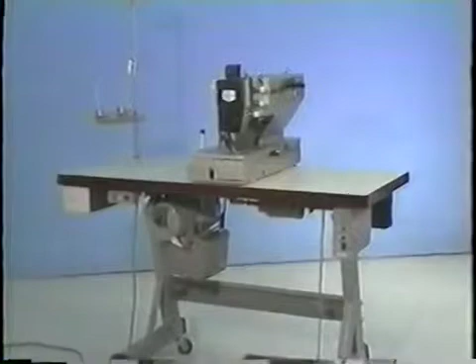Juki has been and will be pursuing essential quality and ideal features of sewing machines, with the intention of realizing a comfortable work environment that satisfies the operator's needs. Types of sewing material and thread are dramatically changing along with the diversification of fashion tastes. This is a newly developed high-performance machine with improved features to catch up with the rapidly changing types of material and thread used to manufacture up-to-date fashion-conscious products.

Our buttonholing machines have enjoyed a good market reputation for their sewing performance, ease of operation, and durability. We have made an overall review on our conventional buttonholing machine and have worked out improvements to its features for more sophisticated design and more powerful sewing ability. Now Juki presents to you our newly developed LBH series machine, ideally suited.

List of applications. The S-type, the standard LBH type, is applied to men's shirts, blouses, etc. The K-type of LBH for knits is applied to knitted underwear, sweaters, etc. Now let's see the following list for other applications.

Specifications. The sewing machine comes with two different types of specifications. One is the electronic stop motor type, and the other is the induction motor type. You can use the machine with or without an automatic run pedal feature.

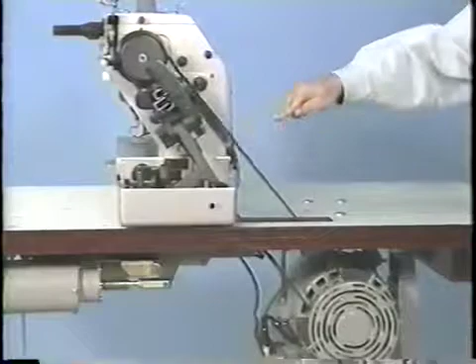Operation: adjusting the belt tension. For the electronic stop motor type machine, the V-belt should slacken about 10 millimeters when you depress the middle of the V-belt with a 1 kilogram load. Loosen the nuts and adjust the tension of the V-belt by moving the motor up or down.

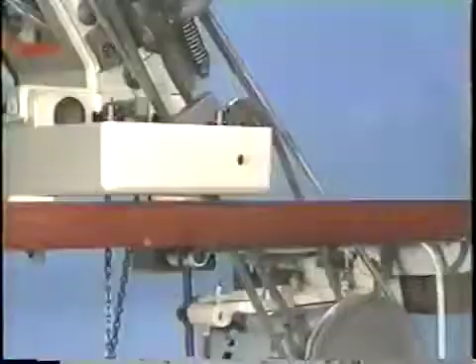For the induction motor type machine, the high-speed belt should slacken about 20 millimeters and the low-speed belt should slacken about 10 millimeters when you depress the middle of respective belts with a 1 kilogram load. Adjust the high-speed belt tension by loosening the nuts and moving the motor mounting base up or down. Adjust the low-speed belt tension using this screw.

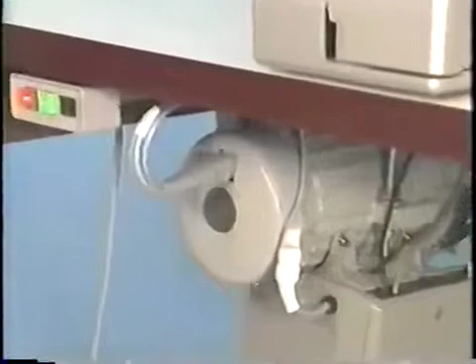Rotational direction. The sewing machine rotates counterclockwise as viewed from the back. For the machine with an electronic stop motor, turn on the power switch when the needle bar is not in its upper stop position. If the machine rotates in the reverse direction, disconnect the connector on the rear of the motor once and reconnect it after turning it 180 degrees.

Lubrication. Tilt the machine head and pour Juki New Defrix Oil No. 1 up to the middle of the red marker lines on the oil gauge.

Threading the machine head. It is very important to thread the machine head correctly. Failed threading of the machine head may result in malfunction of the machine. Please take care to thread the machine head correctly as shown on the display.

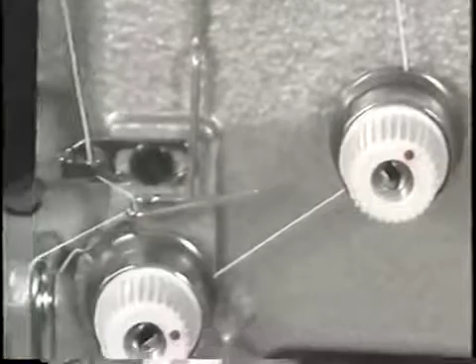When using synthetic filament thread, you should thread all 3 holes in the bobbin thread guide of the needle bar. When using cotton thread or spun thread, you should thread the upper and lower holes. It is not necessary to thread the middle hole.

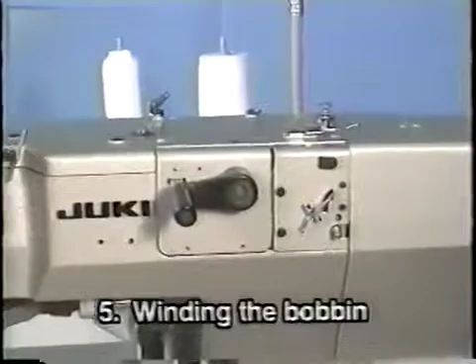Winding the bobbin. Fit a bobbin to the bobbin winder shaft. Thread the tension post guide number 1 and the bobbin thread guide. Wind the bobbin thread round the bobbin several times. Now press the bobbin guide to wind the bobbin.

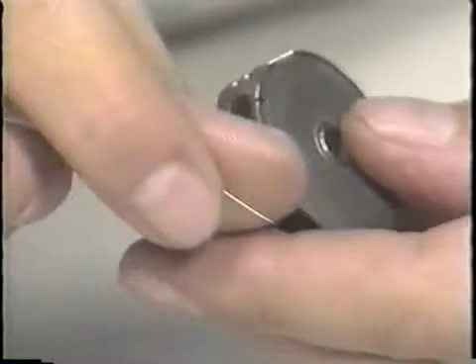Threading the bobbin case. For purl stitching, thread the bobbin case to allow the bobbin to turn counterclockwise, as displayed on the screen. For whip stitching, thread the bobbin case to allow the bobbin to turn clockwise, as displayed on the screen.

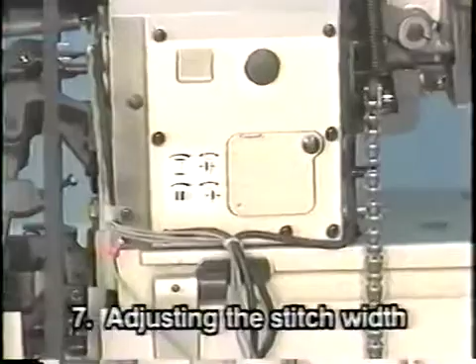Adjusting the stitch width. Open the cover. Adjust the stitch width using screw 1. Turn it counterclockwise to decrease the stitch width, or clockwise to increase it. Adjust the right stitch baseline of the parallel stitch part of a buttonhole using screw 2. Turn it counterclockwise to move the right stitch baseline to the left, or clockwise to move it to the right.

Adjust the left stitch baseline of the parallel stitch part of a buttonhole using screw 3. Turn it counterclockwise to move the left stitch baseline to the left, or clockwise to move it to the right. Adjust the bar tacking width using screw 4. Turn it counterclockwise to decrease the bar tacking width, or clockwise to increase it.

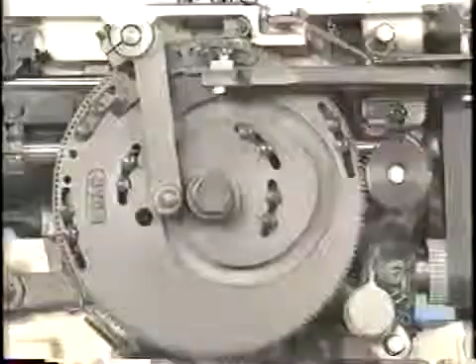The machine has bar tacking cams number 1 and number 2. You can increase or decrease the number of stitches to be made at the bar tacking part of a buttonhole by only changing these cams.

Adjusting the stitch length. Draw the cam cover holder and remove the cover. Then raise the feed bracket cover. Loosen the nut. Set the pointer at the scale line on the bell crank, indicating the stitch length you desire. Then tighten the nut.

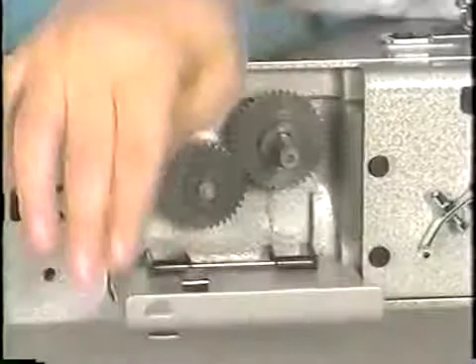Changing the number of stitches. Remove the manual feed handle and open the cover. Remove the gear from the machine and install a gear for the number of stitches you desire. The table shows the available gear types. An alphabet and the number of stitches are engraved on respective gears. Combine gears with the same alphabet.

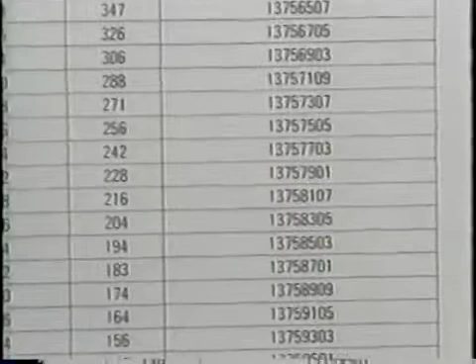The gear on the right-hand side shaft determines the number of stitches. Fit a gear onto the right-hand side shaft, close the cover, and attach the manual feed handle.

Manual feed handle. When the work clamp carrier is in its stop motion position, or when you wish to restart sewing from a point of thread breakage, turn the manual feed handle to make the work clamp carrier unit move.

Emergency stop. For the electronic stop motor type machine, the machine stops during an emergency when you fully depress the emergency stop lever manually. Low-speed operation. Lower the emergency stop lever and dislocate the low-speed stopper. Then actuate the sewing machine and the machine will carry out its low-speed operation.

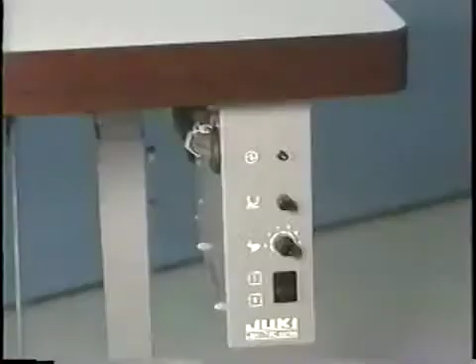Operating the control box for the electronic stop motor type machine. Turn on the power switch and the power indicator LED will light up. Turn the sewing speed adjustment dial clockwise to increase the sewing speed, or counterclockwise to decrease it.

Open the cover of the control box, where you will find dip switches on the CPU circuit board. For the electronic stop motor type machine, 2 stitches at the start of sewing are sewn at low speed. Set this dip switch to its on position when your machine uses an electronic stop motor.

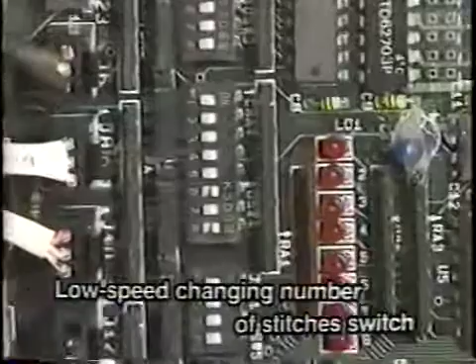Set this dip switch to its on position when your machine is equipped with the 1-pedal unit. Set this to its on position when you wish to slow the timing to start the sewing machine. You can change the number of stitches to be sewn at low speed using switches 6 through 8.

You can change the speed of the sewing machine during low speed operation using switches 1 through 3. You can change the lifting speed of the work clamp check using switches 2 through 4. You can select either single stitching or double stitching using this switch.

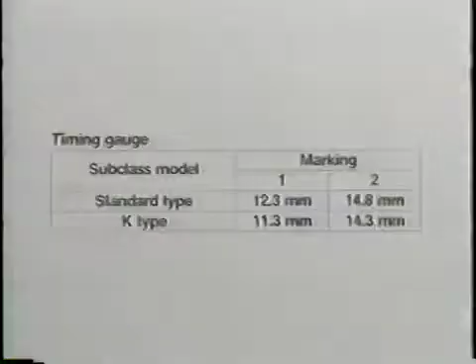Adjustments. Adjusting the height of the needle bar. Align the needle with the center of the needle hole in the throat plate at the left-hand side parallel stitch part of a buttonhole. Determine the height of the needle bar using timing gauge 1. The sizes of timing gauge are as shown in the table on the screen. Adjust the height of the needle bar using the needle bar connection screw.

Adjusting the timing relation between the needle and the hook and the needle guard. Align the needle with the center of the needle hole in the throat plate at the left-hand side parallel part of a buttonhole. When the needle starts ascending from its lowest position, align the blade point of the hook with the center of the needle using timing gauge 2.

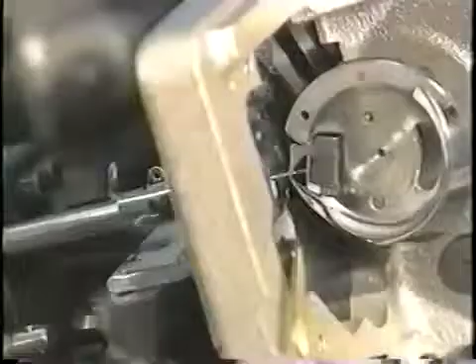At this time, the distance between the upper end of the needle eyelet and the blade point of the hook should be 1.3 to 1.5 millimeters. In addition, a clearance of 0.01 to 0.04 millimeters should be provided between the needle and the blade point of the hook. Loosen the inner hook screw and adjust the clearance to this amount. At this time, confirm that the needle is 0 to 0.02 millimeters away from the needle guard.

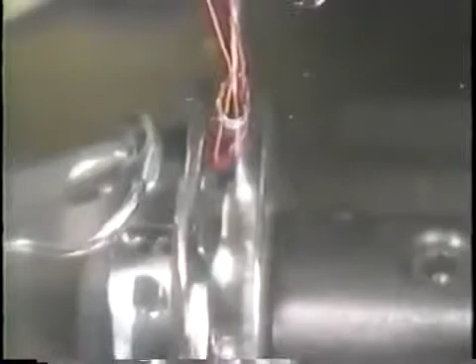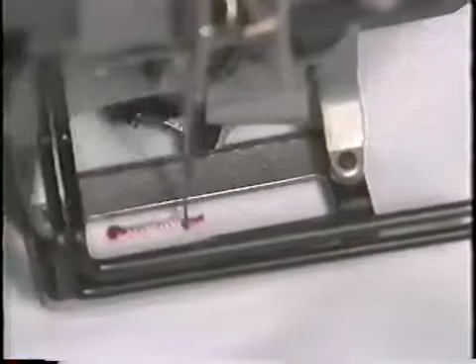Now let's check the timing relation between the needle and the hook. Check the actual seam.

Tie stitches. For tie stitches made at the sewing end, adjust the tie stitch width to 0.3 to 0.6 millimeters using the screw. Turn the screw counterclockwise to decrease the stitch width or clockwise to increase it. If you set the tie stitch width to an excessive width, frayed stitching may result.

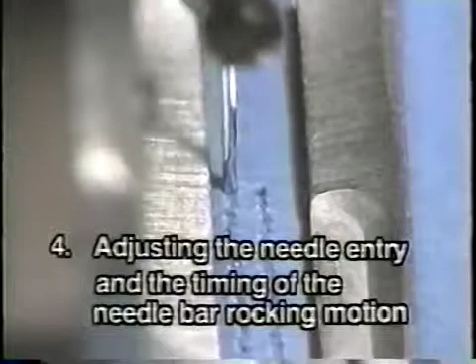Adjusting the needle entry and the timing of the needle bar rocking motion. The needle should enter the center of the needle hole in the throat plate at the left-hand parallel stitch part of a buttonhole. Make an adjustment properly using the screw in the back of the needle bar rocking bracket.

For the needle bar rocking timing, loosen screws number 1 and number 2 in the needle bar rocking small gear, and adjust so that the forked section of the needle bar rocking rod is aligned with the marker line on the needle bar rocking cam by turning the rocking cam shaft.

Position of the origin of the length regulating shaft bell crank, lower, and installing position of the stop motion cam. Turn the manual feed handle to make the main cam rotate until the center of the roller of the length regulating shaft bell crank, lower, and the marker line are on the main cam.

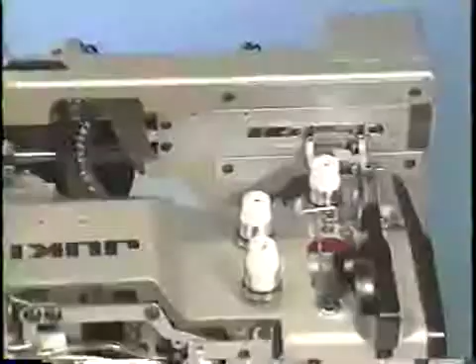Then, loosen the screw in the bell crank. Loosen the nut of the length regulating shaft, then move the shaft along the arch groove in the length regulating shaft bell crank upper until the bell crank upper does not move longitudinally. Tighten the screw in the length regulating shaft bell crank lower at this position.

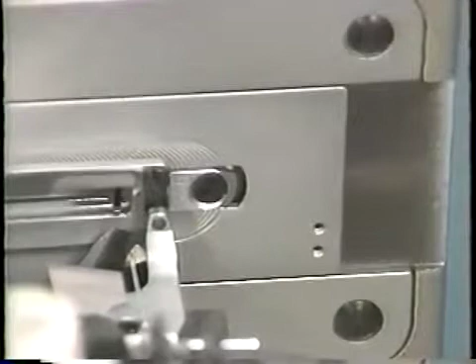It is necessary to confirm that no vertical play is left to the length regulating shaft bell crank. Install the stop motion cam at the position making the machine stop when the marker line on the main cam S comes to the center of the main cam driving gear shaft. Adjust the installing position of the stop motion cam using the screw in it.

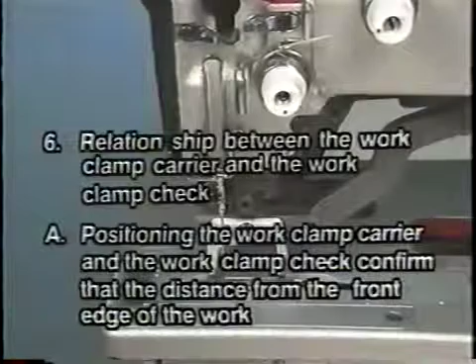Relationship between the work clamp carrier and the work clamp check. While positioning the work clamp carrier and the work clamp check, confirm that the distance from the front edge of the work clamp carrier and the front end face of the inside of the work clamp check is 38.5 millimeters. Adjust the distance using the screw in the feed bracket.

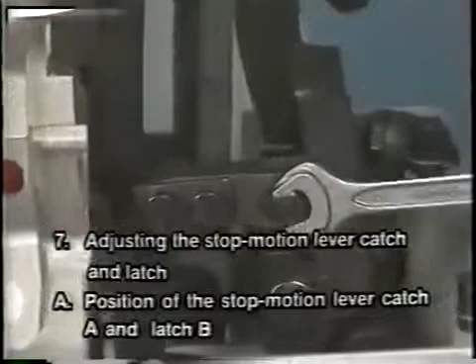Adjusting the stop motion lever catch and latch. Position of the stop motion lever catch A and latch B. Loosen the bolt in catch A when the machine is in its stop motion position. Move the catch up or down so as to adjust the clearance between catch A and latch B to 0.2 to 0.5 millimeters. Then tighten the bolt.

Adjust the pressure spring of the induction motor type machine so that the screw protrudes about 5 millimeters from the bottom of the nut. Now, tighten the nut.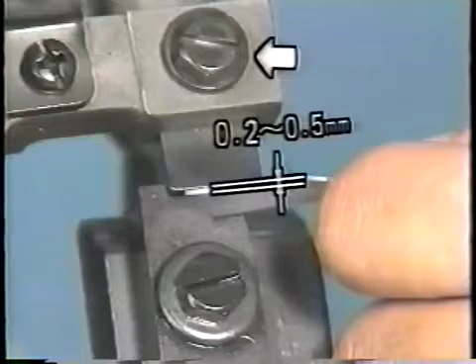Electronic stop motor. Position of catch A and latch B. After the machine has stopped and before the stop motion magnet starts moving, loosen the bolt in catch A. Move catch A up or down so as to adjust the clearance between catch A and latch B to 0.2 to 0.5 millimeters. Then tighten the bolt.

When the stop motion magnet starts moving, a clearance of 0.5 millimeters should be provided between catch A and latch B. Loosen the screw in the stopper and the screw in the stopper guide, and adjust the clearance properly.

Position of the stop motion presser plate. Loosen the screw and adjust the clearance between the stop motion presser plate and the presser bar spring from 0 to 0.5 millimeters in the high-speed operation state.

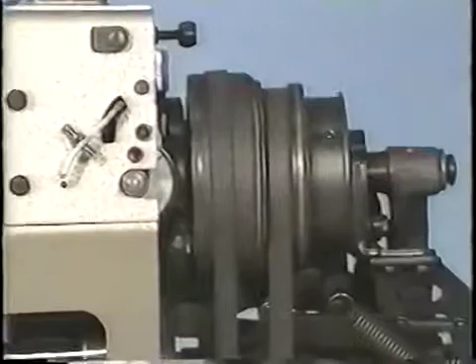Adjusting the reduction gear unit. At the time of stop motion, the high-speed pulley should be 0.25 to 0.35 millimeters away from the driving pulley, and the low-speed pulley should be 0.4 to 0.5 millimeters away from the switching clutch. Loosen the screw and adjustment nut in the clutch switching cam, and make the adjustment using the adjustment screw.

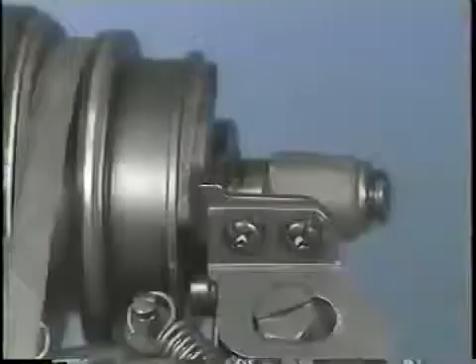Adjust the brake disc so that a clearance of 0 to 1.0 millimeters is provided between the slot in the brake mounting plate and the screw in the stop motion state.

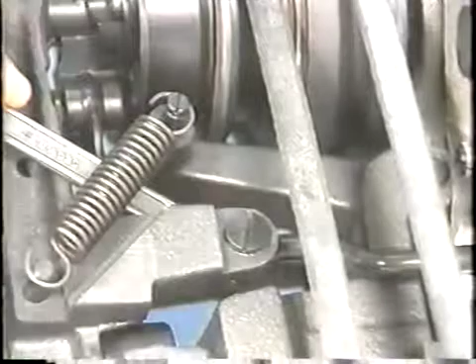Position of the starting link. Turn the eccentric shaft to the stop motion position and adjust the clearance between the starting link and the starting plate to 0.3 to 0.5 millimeters. Then, tighten the nut.

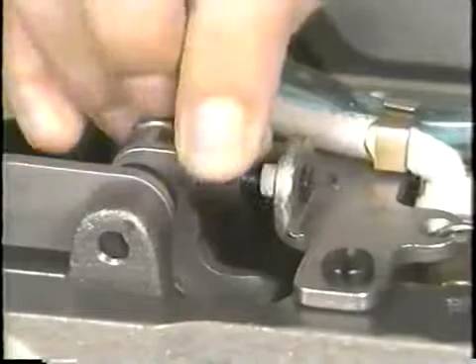Position of the ratchet resetting lever. When the knife bar driving lever bell crank is engaged with the knife bar driving crank in the low-speed operation state, the ratchet resetting lever should be 0.5 to 1.0 millimeters away from the screw in the knife bar stopper driving lever bell crank. Adjust the clearance to the value by positioning the stopper. This adjustment is necessary to allow the knife to drop without fail in the low-speed operation state.

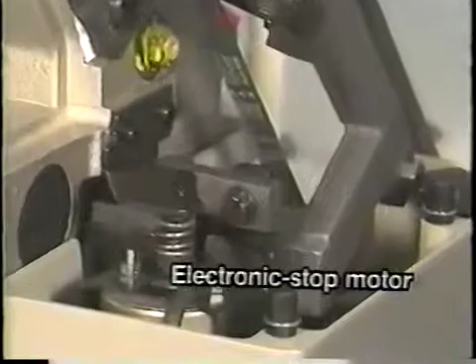Adjusting the stop-motion gearing arm link shaft. For the induction motor type machine, the stop-motion lever must be positioned at the top of the stop-motion cam. For the electronic stop motor type machine, the second step of the stop-motion lever catch A should be engaged with the stop-motion lever latch B.

Under this condition, adjust the stop-motion gearing arm link shaft so that the knife bar driving lever bell crank moves on the knife driving ratchet guide plate by 0 to 0.5 millimeters toward the frame. This adjustment is necessary to prevent the knife from dropping in the stop-motion state.

Position of the high-speed safety link. Pull the stop-motion lever until a 0.7 millimeter clearance is provided between the stop-motion lever catch A and latch B. Now start adjusting the position of the high-speed safety link. Make the stop-motion catch A and latch B engage with each other at the low-speed operation position. Then temporarily tighten the screw.

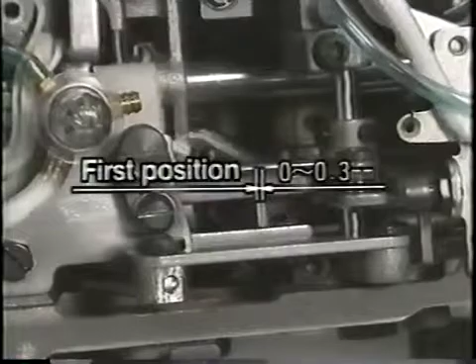Then pull the stop-motion lever until the stop-motion lever catch A is 0.7 millimeters away from latch B. In this state, turn the high-speed safety link and adjust so that the knife bar driving lever bell crank travels on the knife tripping lever guide plate by 0 to 0.3 millimeters toward the frame. Again, make catch A and latch B engage with each other at the low-speed operation position and tighten the screw. This adjustment is necessary to prevent the knife from dropping in the high-speed operation state.

Position of the knife bar driving lever bell crank. When the knife bar driving crank is in the lowest position of its stroke, it should be 0.2 to 0.4 millimeters away from the knife bar driving lever bell crank. Loosen the nut and adjust the clearance to the value using the screw in the knife bar driving lever stopper.

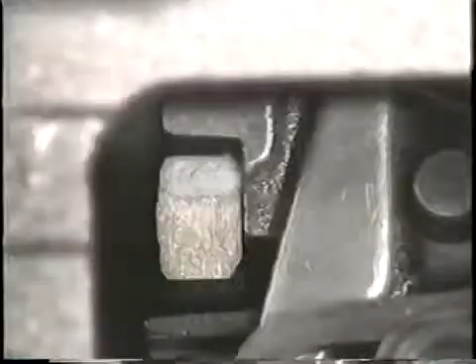Position of the ratchet pawl B. When the top end of the knife bar driving lever bell crank claw comes in contact with the ratchet pawl B, they should overlap with each other by 2.0 to 3.0 millimeters. Turn the hook adjustment screw in the eccentric shaft and adjust the clearance properly.

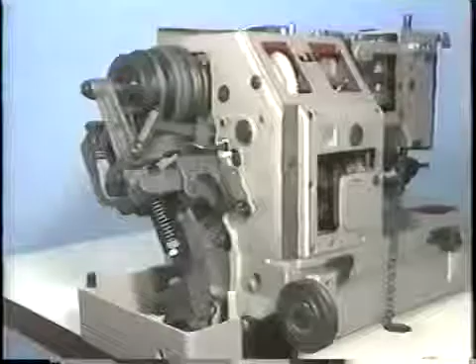Adjusting the tension of the timing belt. Loosen the adjustment nut and the lock nut of the left-handed screw in the idler arm. Tilt the machine head. Press the timing belt with your fingers so that it slackens. Then tighten the adjustment nut and the idler arm lock nut, respectively.

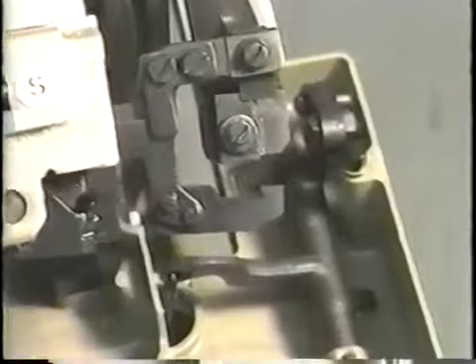Position of the emergency stop plate for the induction motor type machine. When the stop motion lever catch A and latch B are engaged with each other at the low speed operation position, a vertical clearance of 0 to 0.2 millimeters should be provided between the edge of the emergency stop plate and the edge of catch A, and the emergency stop plate should overlap catch A by 0.2 to 0.4 millimeters. Loosen the screw and make the adjustment by moving the emergency stop plate vertically and laterally.

Adjusting the stop position of the needle for the electronic stop motor type machine. Remove the pulley cover. Adjust the upper stopping position of the needle using the screw. Set the screw at the left-hand side to quicken the timing to stop the machine, allowing the machine to stop before the marker dot. Set the screw at the right-hand side to retard the timing to stop the machine, allowing the machine to stop beyond the marker dot.

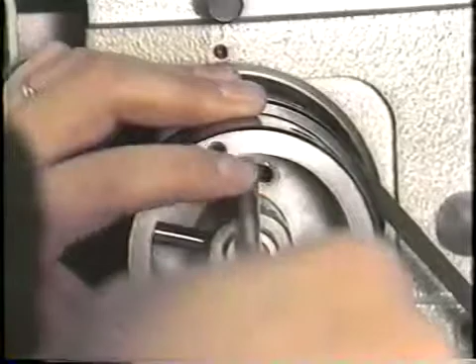This position is the standard position, where the red marker dot and the white marker dot are aligned with each other. Adjust to align the dots.

Adjusting the needle thread trimmer. Longitudinal position of the needle thread trimmer. Before the thread is trimmed, the distance from the center of the needle to the thread presser spring should be 1 to 2 millimeters. After the thread is trimmed, it should be 2 to 3 millimeters. Loosen the screw in the needle thread actuating arm A and make the adjustment by moving the arm back and forth.

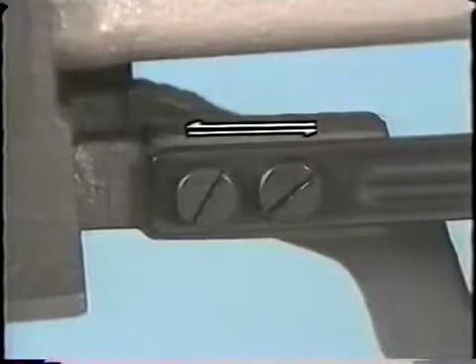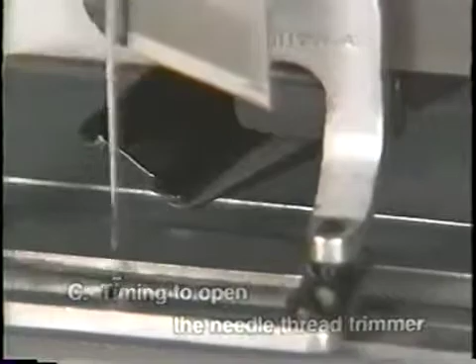Timing to open the needle thread trimmer. Loosen the screw in the knife actuating cam and adjust so that the needle thread trimmer is kept closed for 2 to 3 millimeters from the sewing start by moving the actuating cam back and forth. A distance of 2 to 3 millimeters is equivalent to a seam length of 5 or 6 stitches when the number of stitches is set to 126.

Adjusting the locking bracket. Adjust the position of the locking bracket so that the needle thread trimmer stays on top of the needle thread trimmer actuating cam. Loosen the screws in the locking bracket and make the adjustment by moving the bracket vertically and laterally.

The vertical overlapping width should be adjusted to 1.5 to 2 millimeters and the lateral clearance to 0.3 to 0.5 millimeters. After the adjustment, confirm that a 3 millimeter or more distance is obtained between the groove in the knife blade and the top end of the needle thread trimmer.

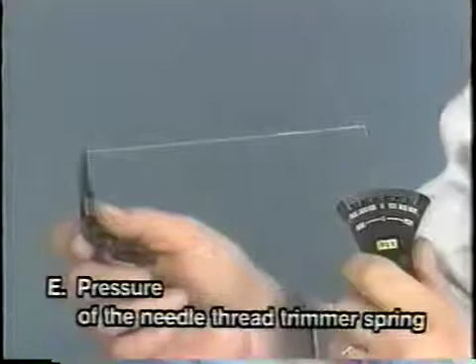Pressure of the needle thread trimmer spring. If using a Tetron thread number 50, a pressure of 150 grams or more is required to securely catch the thread when the thread is pulled at right angles to the blade.

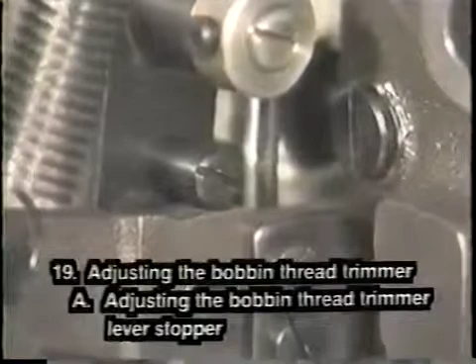Adjusting the bobbin thread trimmer. Adjusting the bobbin thread trimmer lever stopper. Adjust so that the clearance between the bobbin thread trimmer and the bobbin thread trimmer lever stopper is 0.1 to 0.3 millimeters when the presser bar lifting lever comes in contact with the presser bar lifting lever stopper A.

Timing to close the bobbin thread trimmer. Temporarily tighten the screw in the bobbin thread trimmer link shaft. Turn the bobbin thread trimmer link shaft counterclockwise and gradually lower the presser bar lifting lever by hand. When the timing to close the trimmer quickens so as to close it beyond the forward travel end of the trimmer, the closing amount is increased.

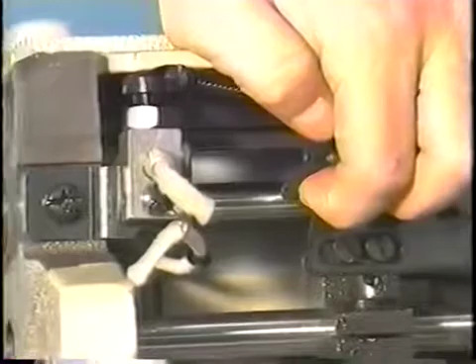Open the trimmer using the lever. Turn the bobbin thread trimmer link shaft clockwise to retard the timing to close the trimmer, resulting in an insufficient closing amount.

Turn the link shaft further counterclockwise and adjust so that the crest of the upper blade of the bobbin thread trimmer aligns with the edge of the throat plate base.

Timing to open the bobbin thread trimmer. Move the feed bracket using the manual feed handle. Loosen the screw in the bobbin thread trimmer actuating cam and make the adjustment by moving the cam back and forth. The type of thread used determines the size of the slot and the screw as indicated on the display. After the adjustment, confirm that the bobbin thread trimmer opens without fail.

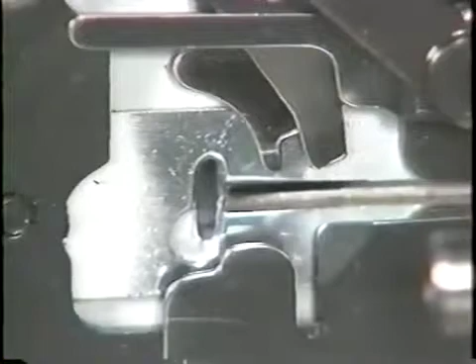Knife descending position. Lower the knife and check the lateral and longitudinal distances from the knife to the throat plate base. For the lateral position of the drop knife, loosen the screw in the knife bar holder and make the adjustment by turning the knife bar. Adjust the longitudinal position of the drop knife by moving the knife installing base back and forth.

Timing to drop the knife. The knife should descend to cut the materials just before the final 3 or 4 stitches are formed. Make the adjustment by changing the position of the knife tripping segment mounted on the main cam. When you have changed the number of stitches, confirm and adjust the timing to drop the knife.

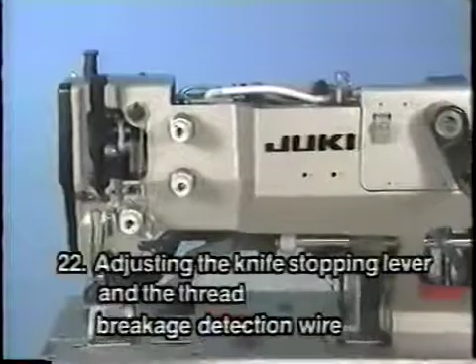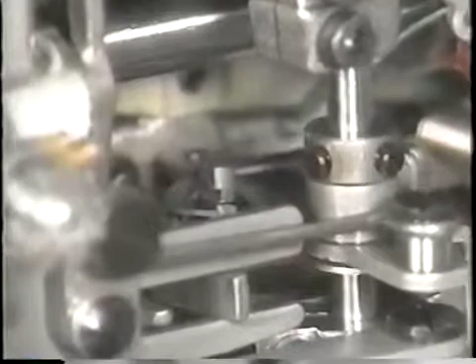Adjusting the knife stopping lever and the thread breakage detection wire. Temporarily tighten the screw in the thread breakage detection wire. Confirm that the knife stopping lever lightly moves. Then, temporarily tighten the screw in the knife stopping lever when the lever is brought to the position to come in contact with the knife stopping lever shaft.

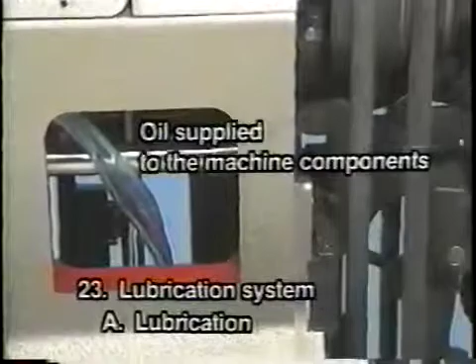Lubrication system. Lubrication. The lubrication pump discharges oil from the oil pan to the plunger pump by way of the lubrication pipe, which is blue. Then the oil is supplied to the machine components from the plunger pump. The oil in the faceplate returns to the oil pan through the returning pipe, which is pink.

Adjusting the oil amount. Adjusting the amount of oil in the hook. The amount of oil in the hook is adjusted by turning the adjustment screw. Place a sheet of paper under the hook and confirm that oil splashes as displayed on the screen during 5 operation cycles of the sewing machine.

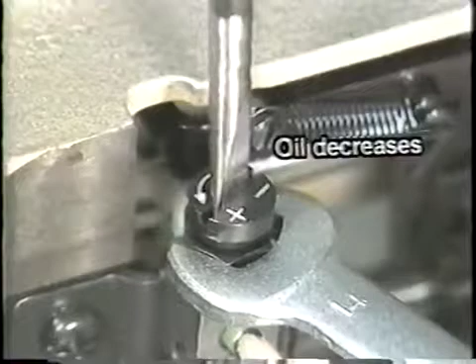Adjusting the amount of oil in the faceplate. The amount of oil in the faceplate is adjusted by turning the crank oil amount adjustment pin. Place a sheet of paper into the faceplate and confirm that oil splashes as displayed on the screen during 5 operation cycles of the sewing machine.

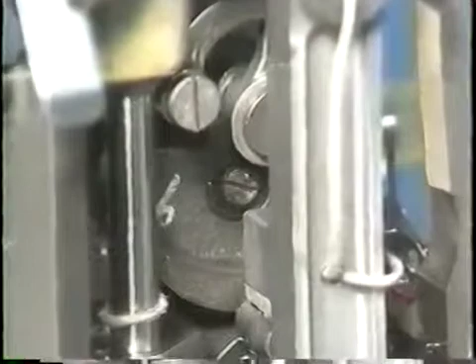Stitching adjustment. Adjusting the needle thread tension. Adjust the needle thread tension using tension post number 1, number 2, and number 3. When performing purl stitching with the seam crest at the parallel stitch part of a buttonhole, first adjust the needle thread tension at the bar tacking part number 1 using the tension post number 3. Then adjust the thread tension at the bar tacking part number 2 using tension post number 2. Lastly, adjust the thread tension at the parallel stitch part using tension post number 1.

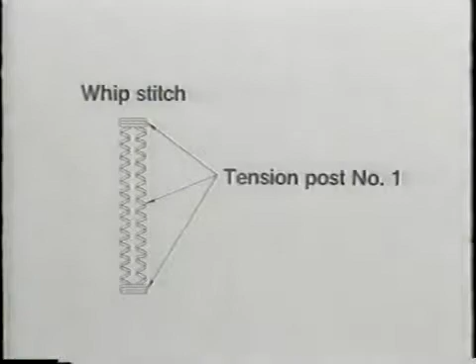For whip stitching, without a seam crest at the parallel stitch part of a buttonhole, set tension post number 2 and number 3 to 0 and adjust the needle thread tension using only tension post number 1. Adjusting the timing to release the thread tension. Timing to release tension post number 1. Release tension post number 1 at the bar tacking parts number 1 and number 2 of a buttonhole and perform whip stitching. The floating amount of the tension disc should be adjusted to 0.2 to 0.6 millimeters by tightening or loosening the disc.

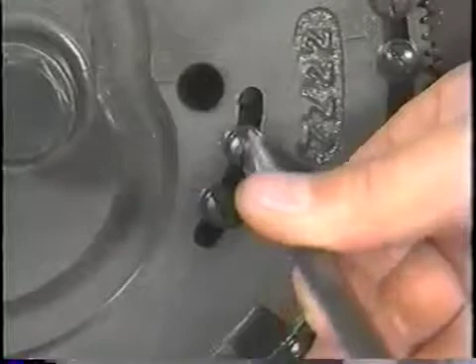Adjust the timing to release the thread tension so that the releasing action completes 1 or 2 stitches before the sewing end of the bar tacking number 1. The thread tension releasing action at the start of sewing should be adjusted so that it completes when 3 or 4 stitches are formed. Make the adjustment using the tension releasing cam number 2.

The tension disc of the tension post number 2 floats when the sewing machine is in the low-speed operation state, or when the sewing machine enters into the stop-motion state and stops. The floating amount of tension disc number 2 should be adjusted to 0.3 to 0.7 millimeters by tightening or loosening the tension post number 2.

The tension disc should float when the sewing machine is in its low-speed operation state, or when it stops. The disc should be closed when the sewing machine runs at high speed. Make the adjustment using tension releasing arm number 2.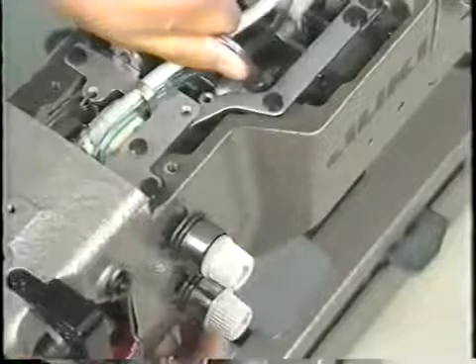The tension disc number 3 floats when the machine is in its stop motion state. The floating amount of the tension disc number 3 should be adjusted to 0.3 to 0.7 millimeters by tightening or loosening the tension post number 3. The tension disc should float when the sewing machine is in its stop motion state. The disc should be closed when the sewing machine is in its low speed or high speed operation state. Make the adjustment using tension releasing arm number 3.

Adjusting the thread take-up spring. Adjust the stroke of the thread take-up spring so that the thread is drawn by 8 to 10 millimeters when the bobbin thread is pulled with its one end fixed. The appropriate bobbin thread tension is 5 to 10 grams when the bobbin thread is drawn until the take-up spring moves by 1 or 2 millimeters.

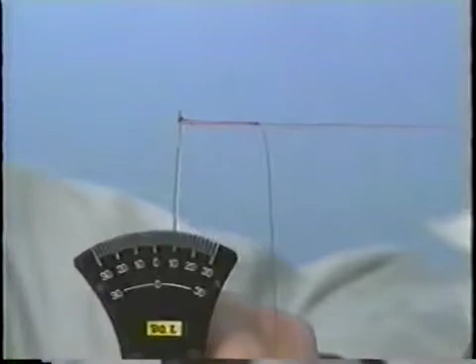Adjusting the thread take-up amount. Loosen the screw in take-up thread guide A and adjust the clearance between guide A and the take-up cover to 3 to 4 millimeters. Moving guide A toward the right will form a well-tensed seam. If it is moved excessively toward the right, the thread may break easily.

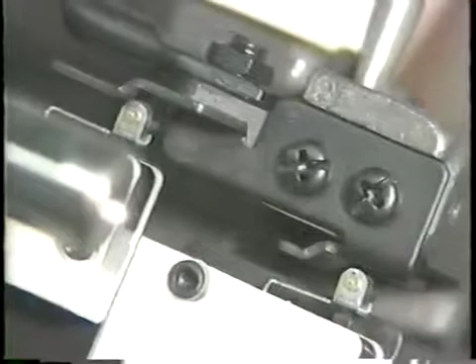Adjusting the switches for the electronic stop motor. Adjusting the stop motion detector switch and the reduction detector switch. The stop motion detector switch should be turned on and the reduction detector switch should be turned off when the machine is in its low-speed operation state. Both switches are turned on when the machine is in its high-speed operation state. Loosen the screw in the switch mounting base when the machine is set to its low-speed operation state. Adjust the clearance between the push button of the reduction detector switch and the switch pressure plate to 0.5 millimeters.

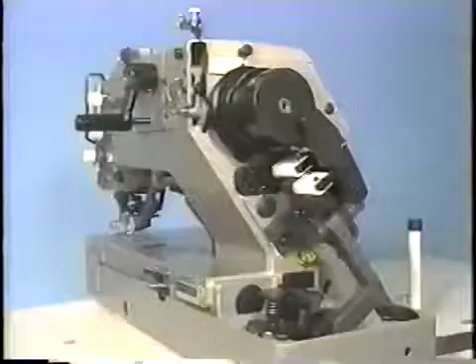Origin detector switch. The origin detector switch is mounted on the back side of the sewing machine. The origin of the cloth feed mechanism is detected when a clearance is provided between the sensors at the time of stop motion.

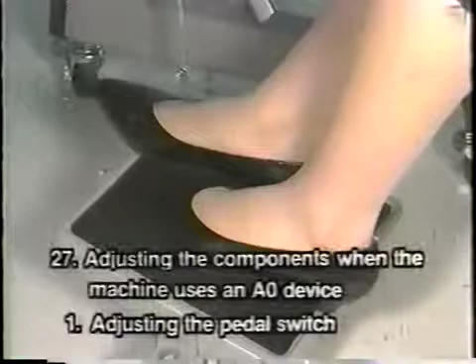Adjusting the components when the machine uses an A0 device. Adjusting the pedal switch. The work clamp check lifting switch of the pedal is turned on when the pedal is not depressed. The start switch of the pedal is turned on when the pedal is fully depressed. The clearance indicated on the display should be adjusted to 0.5 millimeters when each switch is turned on using the switch mounted on the reverse side of this switch.

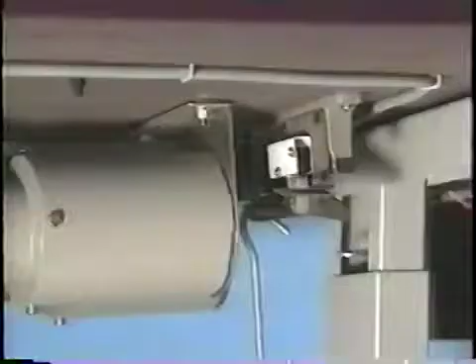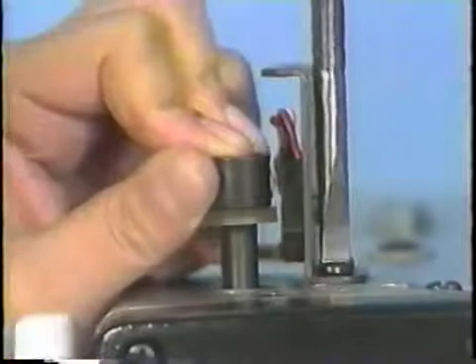Adjusting the knife actuation detector switch. Remove the cover. Loosen the nut and adjust the installing height of the knife actuation detector plate to 38.5 to 40.5 millimeters. Adjust the position of the sensor mounting base so that a clearance of 0.2 to 1.0 millimeters is provided between the magnetic sensor and the stopper.

Adjusting the stop motion detector switch. When the stop motion lever is in its stop motion position, the top end of the push button of the stop motion detector switch should be 0.5 to 1 millimeter away from the actuator. Loosen the screw and make the adjustment.

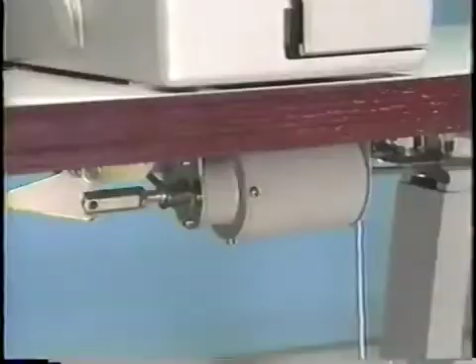Adjusting the starting magnet. The chain should slacken when the starting magnet is not activated. Adjust the screw so that the top end of the screw in the stopper comes in contact with the stop motion lever mounting base when the magnet is activated.

Self-diagnosable system. Remove the connectors on the output side. Set switch 8 of dip switch 3 to its on side and then turn on the power switch. The LEDs light up to tell you that the switches function normally. LED 1 lights up when the stop motion detector switch is normal. LED 2 lights up when the reduction detector switch is normal.

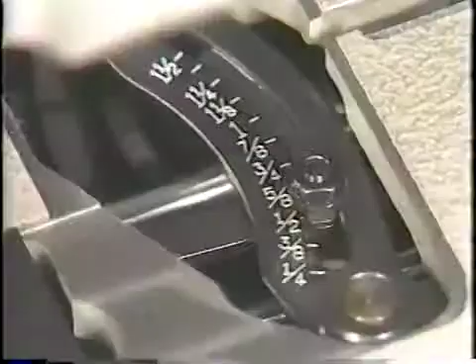This completes the general description of the LBH 790 high-speed one-needle lock-stitch buttonholing machine. Juki has always led the industrial sewing machine industry in responding to the needs of the times. Now, Juki is introducing the LBH 790 to its customers with confidence. The LBH 790 is capable of performing many different kinds of buttonholing to respond to market needs.